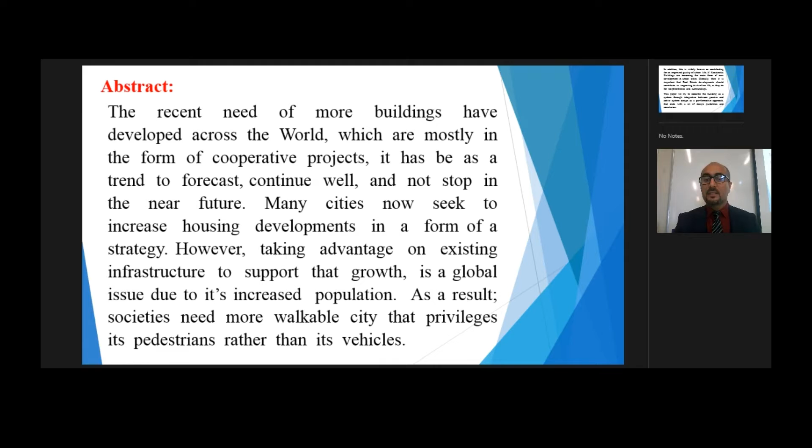Many cities now seek to increase housing development as a strategy. However, taking advantage of existing infrastructure to support that growth is a global issue due to increased population. As a result, cities need to become more walkable, privileging pedestrians rather than vehicles.

This is widely known as a contribution to improved quality of urban life. If residential buildings are becoming the main form of new development in urban cities globally, then real estate development should contribute to improving dwellers' lives, as they do for neighborhoods and surroundings.

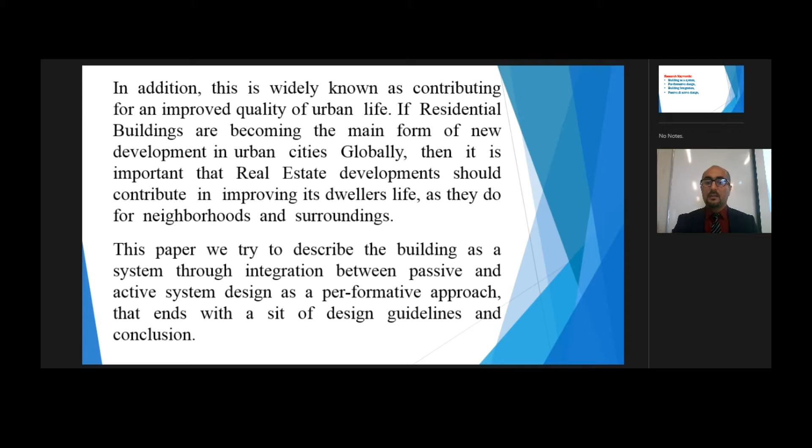This paper will try to describe the building as a system through integration between passive and active system design, as a per-formative approach that ends with a set of design guidelines and conclusions. The main research keywords are building as a system, per-formative design, building integration, and passive and active design.

As an introduction, this research emphasizes how to deliver a better building design approach. The objective of this paper is to help acknowledge architecture designers with up-to-date building science information, in order to help them improve their design projects to reach and enhance sustainable outcomes.

As we know, this can be achieved in steps or main factors. So to achieve this approach, we need to understand or tackle five issues.

These issues are: one, developing energy and water efficiency; two, promoting inhabitant comfort and well-being; extending durability and service life; and reducing energy demand, resilience, thermal comfort, and passive survivability.

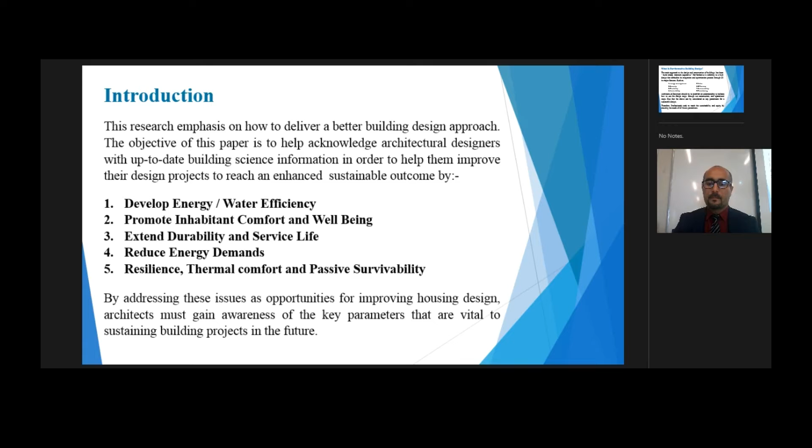Now, what is per-formative building design? The main approach to the design and construction of buildings has been, as we know, build cheap, maintain expensive. So per-formative refers to a high design that embodies integration and optimization processes through all its major features, such as energy management, security, flexibility, accessibility, value, efficiency, sustainability, and functionality.

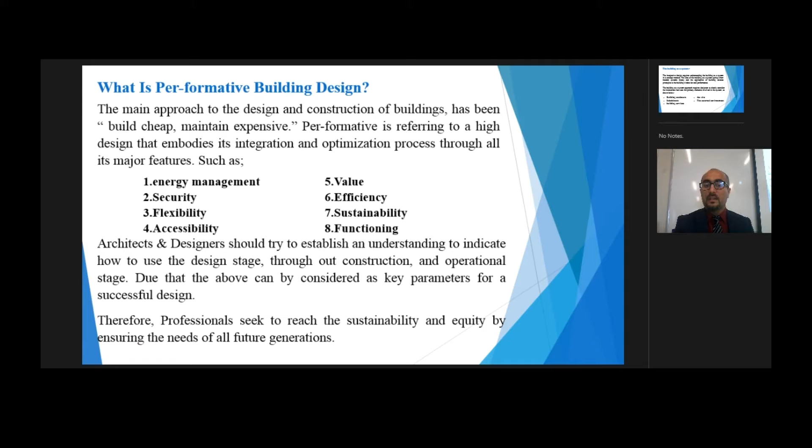Architects and designers should try to establish an understanding of how to use the design stage throughout construction and the operational stage. Due to that, the above can be considered as key parameters for a successful design. Therefore, professionals seek to reach sustainability and equity by ensuring the needs of all future generations.

So coming back to the building as a system: we need to understand the building as a system, which is achieved by understanding its concept manner. The idea of a building as a system springs from modern system theory and the application of building science principles to building behavior, which is related to building behavior and performance.

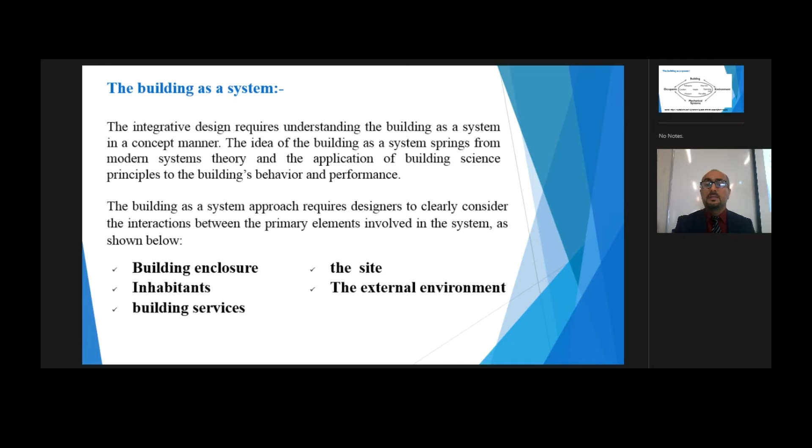The building as a system approach requires designers to clearly consider the interactions between the primary elements involved in the system, as shown below, which is related to building enclosure, inhabitants, building services, the site, and the external environment.

The building as a system, as we can see shown in this figure, gives us insight into how to link the other factors through the building. So buildings are linked together with occupants, mechanical systems, and the environment.

These four are linked together and must be dealt with in parallel to solve or minimize the effect of negative issues, which are related to pollution, heat, fire, moisture, and cost.

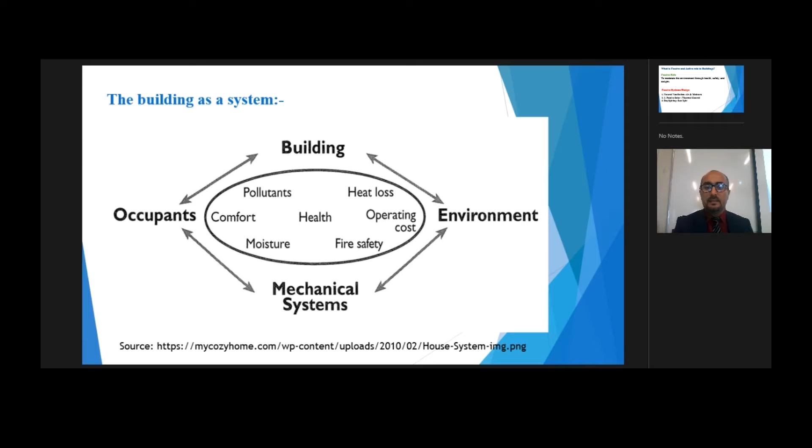What is passive and active role in buildings? To understand the integration and the building as a system, we need to understand the relationships and the roles playing in buildings. So what is passive and active role in buildings?

Passive role is to moderate the environment through health, safety, and delight. Passive system design mainly deals with natural ventilation, providing fresh air and minimizing the effect of moisture.

Second is passive solar, which is related to thermal control. Daylighting, which is related to providing the amount of sunlight needed during the day.

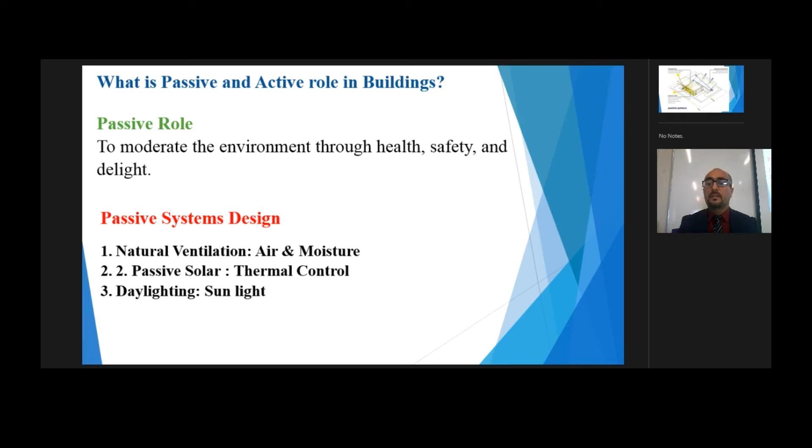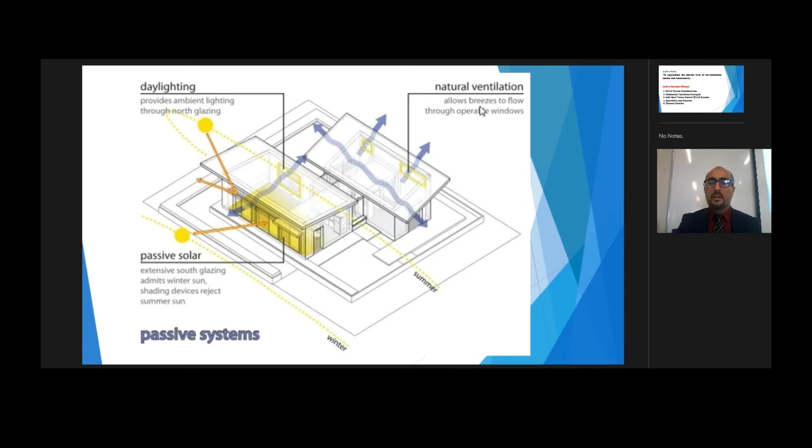We can see here a figure which explains what we have elaborated earlier. We can see the daylighting, which is providing sun and glazed areas, allowing sunlight to enter the indoor environments. This is related to passive solar, which minimizes the effect of solar on buildings, providing ways that can benefit from the natural ventilation, or wind, or fresh air entering the indoor environments.

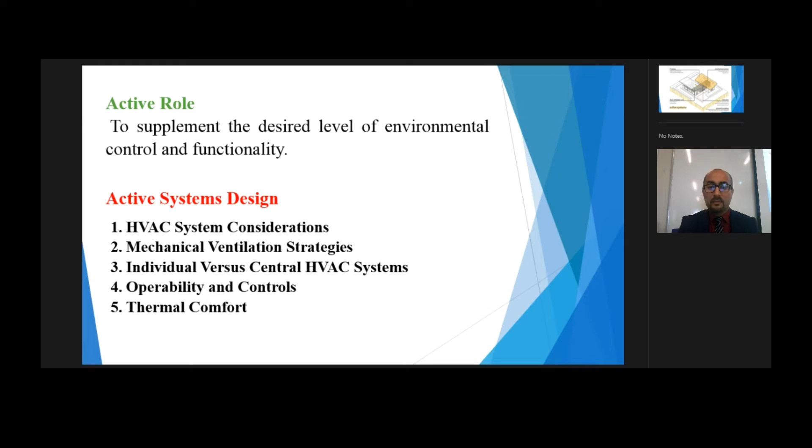On the other hand, active roles play a much more mechanical part of the building. Its main role is to supplement the desired level of environmental control and function. This can be achieved by active system design, which is related to heating, ventilation and air conditioning systems, second to mechanical ventilation strategies, and third, individual and central control, operative control, and thermal comfort.

Here we can see a figure which displays the active system design in buildings. We can see it's related to PV array, mechanical center, duct and piping - so all the needed mechanical systems, electric systems, or control platforms needed to control the indoor environment of the building. Therefore, it's related to the active system; it's much more artificial, not natural.

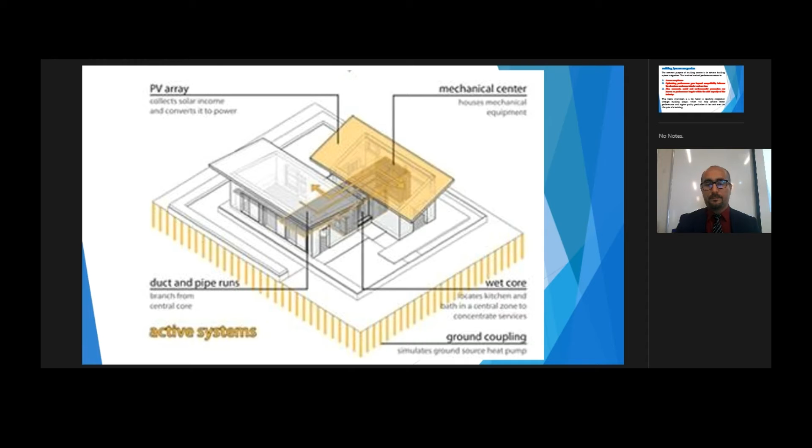So now we can understand building system integration. The common purpose of building science is to achieve building system integration. This involves levels of performance.

That can be achieved by assuring inhabitant compliance, optimizing performance, which goes beyond compatibility between the structure, enclosure, and interior and services. Also, economic, social, and environmental parameters are known as performance targets within the skill capacity of the industry. This means innovation is a key factor in reaching integration through building design, which will help achieve better performance and high quality production at less cost over the life cycle of the building.

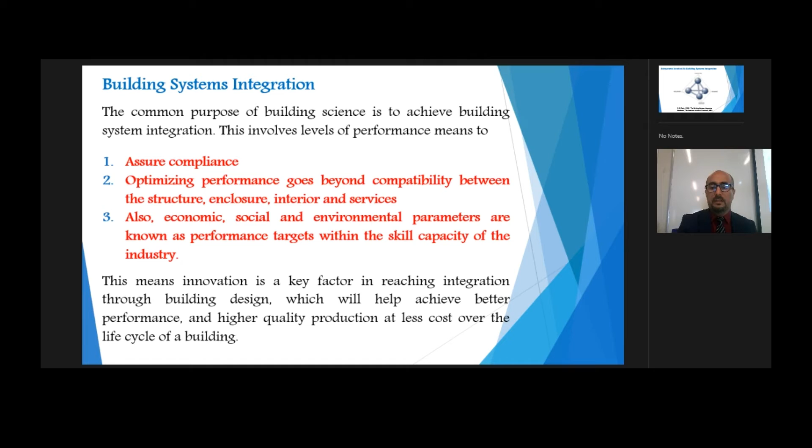Now, after our research, we have given some design guidelines which are very important to upgrade our housing, multi-rise residential buildings, classified into 10 main guidelines. The first one is about scale and typology guidelines, which is related to the dimension of block buildings, and how to break down the building to give much more focal point, and at the same time change the urban planning pattern of the city.

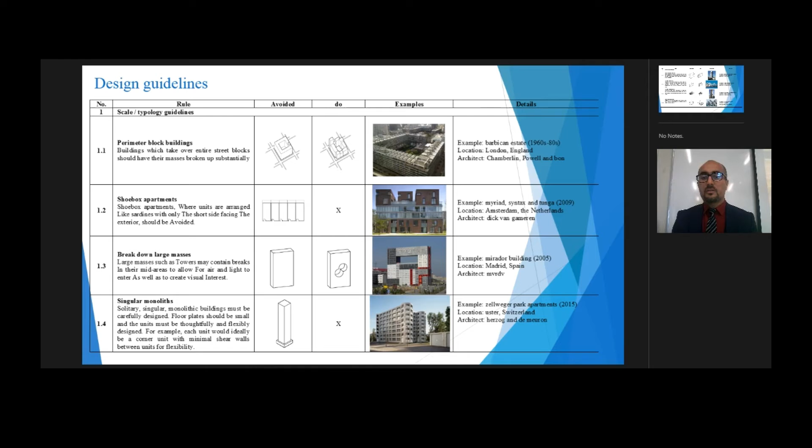This will help to improve the building design and give good insight for the skyline of the city. There are many examples for that, I cannot explain them all, but you're going to have a copy of my presentation, and you can study it much further.

The second one is about massing guidelines, which is related to vertical and horizontal dimensions, making the building much more unique and much more parallel. Sometimes simple is good, but sometimes not just simple, because we need to make some activity of relations between occupants and the building itself, which will make the building much more valuable for all.

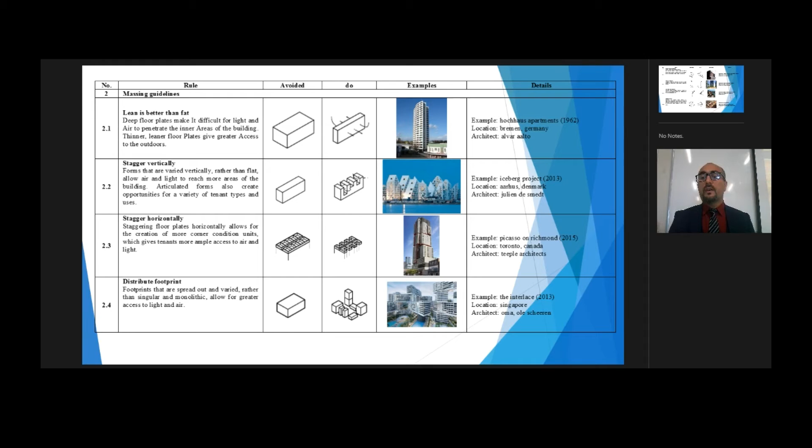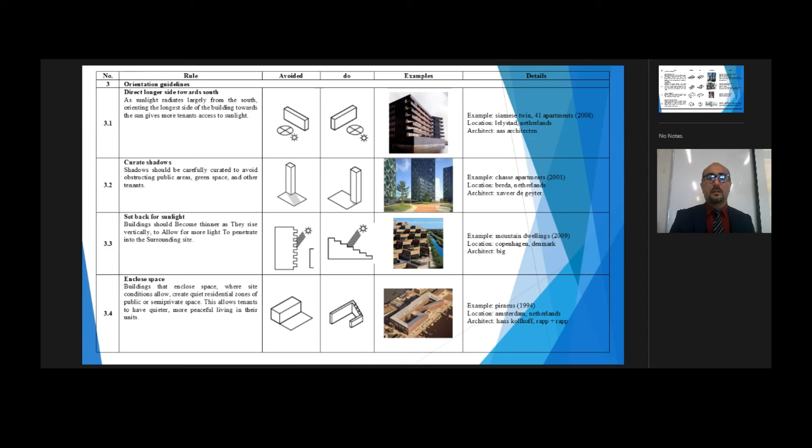The third one is related to the orientation guidelines, which is, as we know, the direction the building faces, the level of shadows, the position of the building, and the enclosure within the outdoor environment.

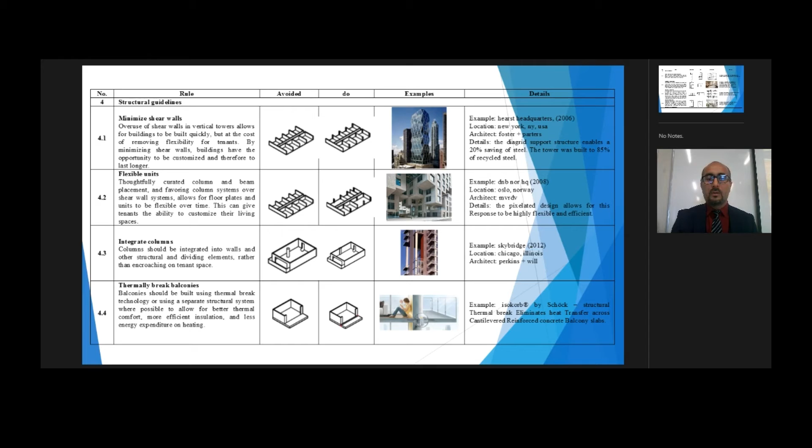And the fourth one is related to structure guidelines, which is related to some physical elements that we need to provide, such as flexible units and thermal breakers for balconies and so on.

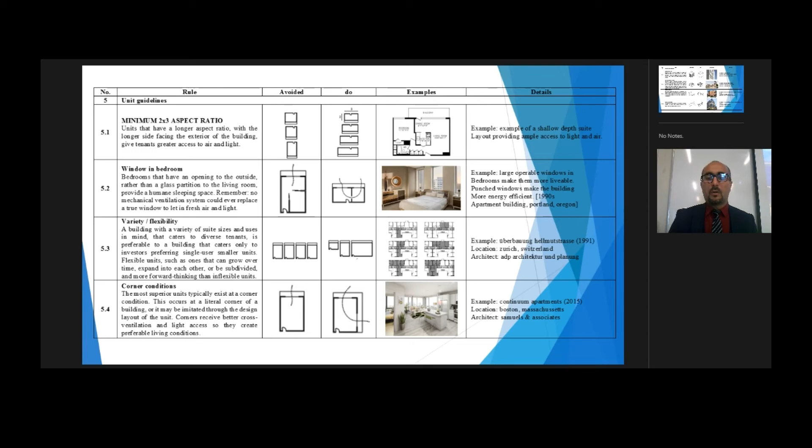The sixth one is related to materials. So, to act more responsibly for the environment and provide a fine design, we need to think about the materials that we use.

We try to minimize the usage of glass in buildings, select materials more locally in the cities, and use much more bright colors rather than dark. This will help us improve our design in the future.

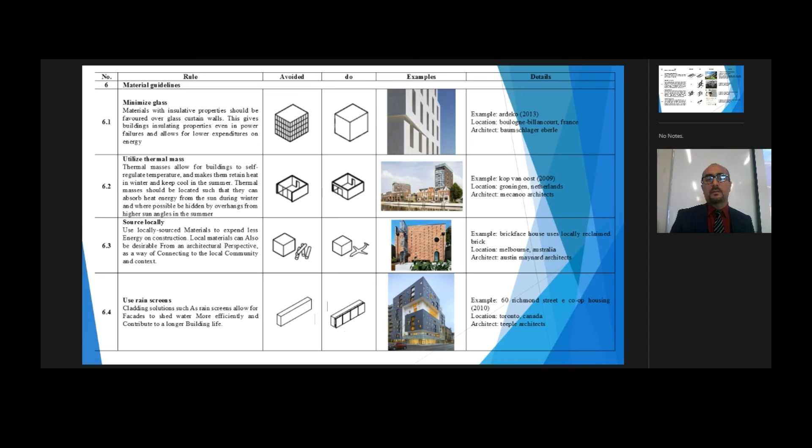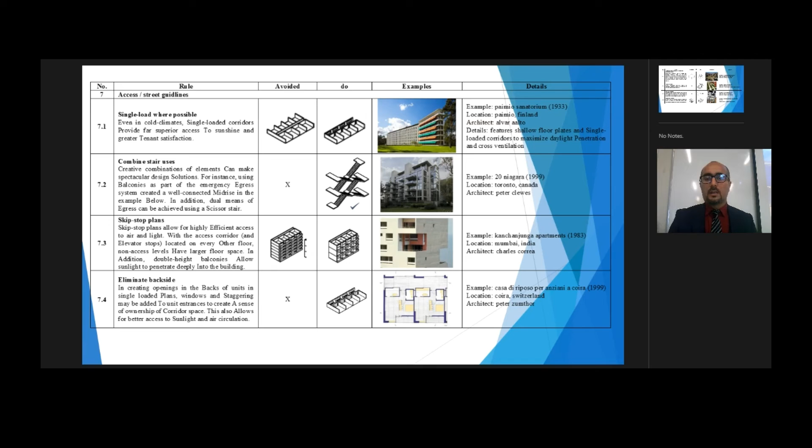The seventh guideline is related to the accessibility of the building, making the doors much more clear, avoiding visual staircases, and sometimes skip-stop plans through the building. This will help give the building that ergonomic side of it.

The eighth is related to indoor and outdoor guidelines, which relates to green courtyards. We need to make that relation between outdoor and indoor, achieved easily by addressing buildings with windows to view all the good things, helping inhabitants feel much more connected to the outdoor environment. This can be achieved by appointing some green courtyards in the building and making links between indoor and outdoor environments.

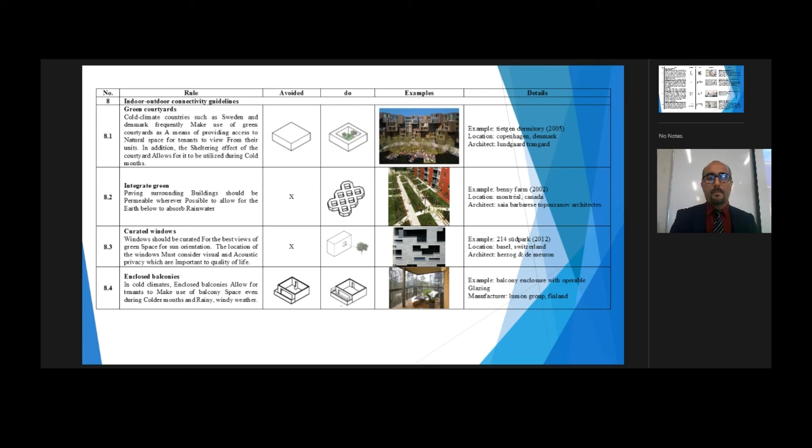The ninth is related to the solar access guidelines, which, as we know, helps the health of the inhabitants and makes them feel much more connected. We need to think about reducing the bad effects of sun during summer and allowing the sun to enter during winter. That will help give the feel of thermal comfort and well-being, and using materials that will reduce the effect of solar access through the buildings.

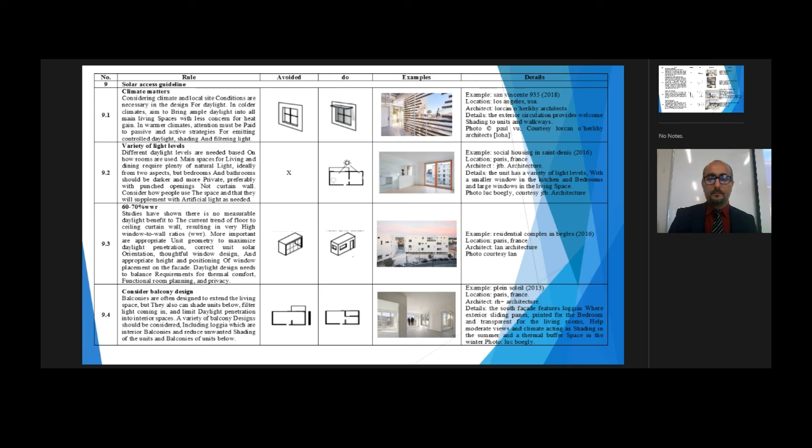The tenth and last guideline is related to daylighting guidelines, which, just like the solar guideline, relates to the usage of sun in the indoor environment. This will help improve our designs and improve the health of the inhabitants. So we need to think about views, shadows, and the amount of sun entering the indoor environments. All this will benefit our design and give it much more value in the future.

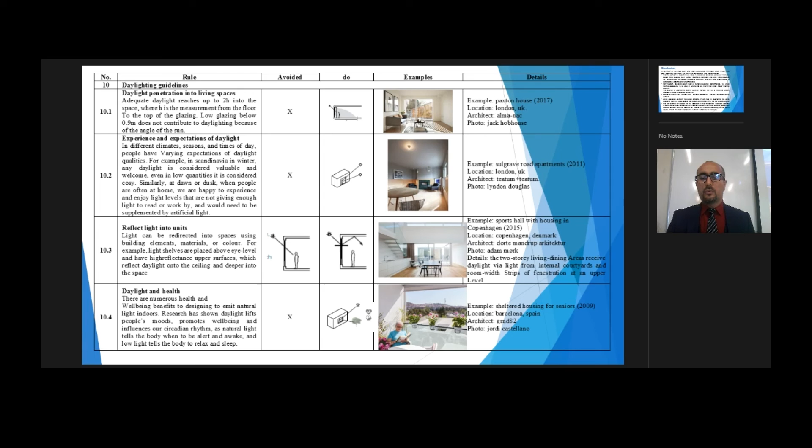As a conclusion for the research paper, thermal comfort is becoming an issue in residential buildings, especially with full glazed walls, because they are not thermally efficient, and over time they become insecure for moisture and air leakage. Therefore, they will need to be refitted at considerable expense and will be uncomfortable.

New modern building design needs better enclosure performance to avoid thermal leakage and to control airflow that affects indoor thermal comfort. The selection of appropriate passive building devices acts as a building design strategy to avoid discomfort situations.

Designers should use suitable heat conduction systems to achieve better enhanced comfort. Using dedicated and smart ventilation systems will help in recovering the extra energy or heat in a closed loop so the indoor environment will not be uncomfortable. The key element of success for this approach is the inhabitants.

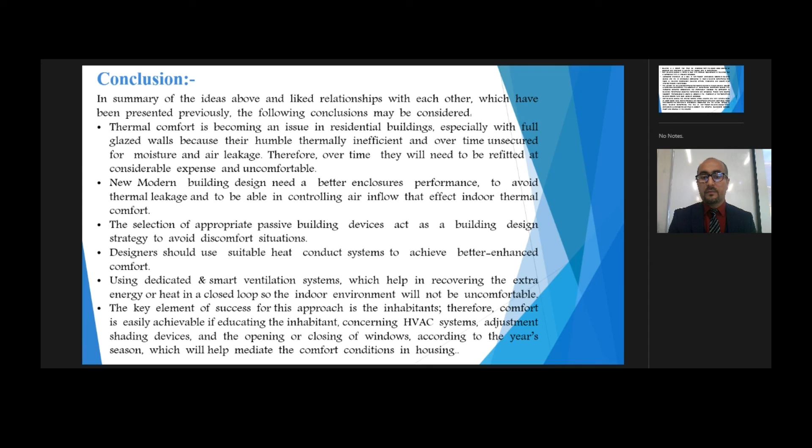Therefore, comfort is easily achievable by educating the inhabitant in concerns of HVAC systems, adjusting shading devices, and opening or closing windows according to the year's season, which will help mediate comfort conditions in housing.

Building is a system that must be integrated from the design stage, together by designers and engineers, to achieve the needed level of performance. New building science is trying to deal with physical requirements of buildings that are compatible with all project processes.

Addressing innovation as a goal in new modern architecture depends on building science and its changeable approaches to reach building performance, which needs all building stakeholders, such as building owners, inhabitants, and society, to be involved through its early stages.

The context for building performance has recently evolved to include issues of ecology and sustainability. This expansion of performance parameters with increasing consumer expectation has dramatically increased the complexity of buildings. Performance objectives, frameworks, conceptual models, and methodologies are necessary to ensure all aspects of the integration of a well-performing building system have been carefully addressed.